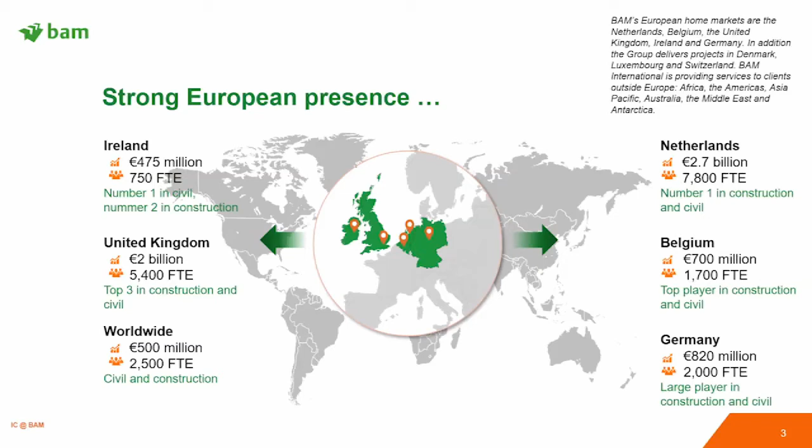I'm here to talk a little bit about manufacturing and construction at Royal BAM Group. Royal BAM Group is a 7.2 billion turnover construction organisation, headquartered in the Netherlands, with around 20,000 employees working worldwide. Our main focus areas are the UK and Ireland, the Netherlands, Germany and Belgium, but we also work on projects worldwide. We work in civil engineering, rail and tunnelling, and also construction and property, building stadia, hospitals and apartments and the like.

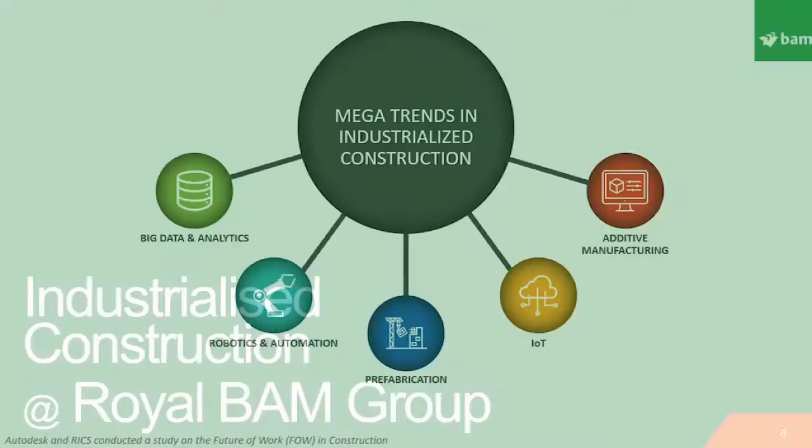So I'm going to talk a little about industrialised construction. Industrialised construction is the application of manufacturing techniques in the built environment. A recent industry report identified 5 mega trends in this area, and I'm just going to focus on those and show what we're doing around the business in relation to them.

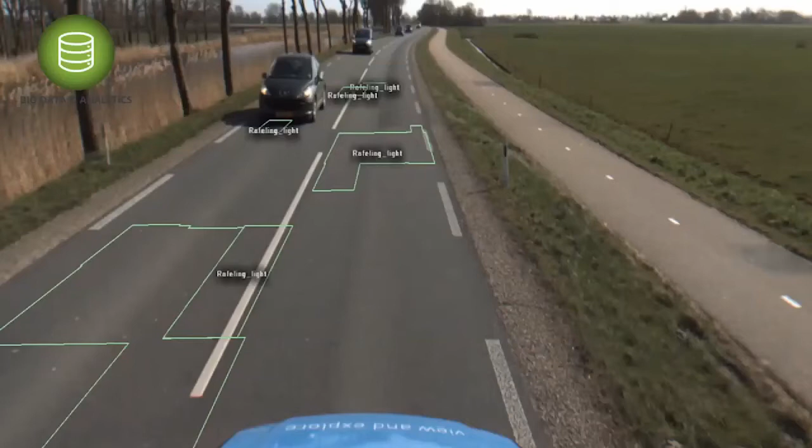So, big data analytics. In construction, we're using big data analytics to look at things like, in this example, surveying roads using a Google camera, a Google truck. This supports the maintenance programs we have in the Netherlands, so we don't need to go out and physically check the road surfaces.

In robotics and automation, we have a number of projects, but one of the more recent ones is the Hinkley Point project in the UK, where we're using machine guidance systems for installing, in this example, anchors. This allows us to do this based on data from the designers going straight into the machines and placing the anchors in the right positions.

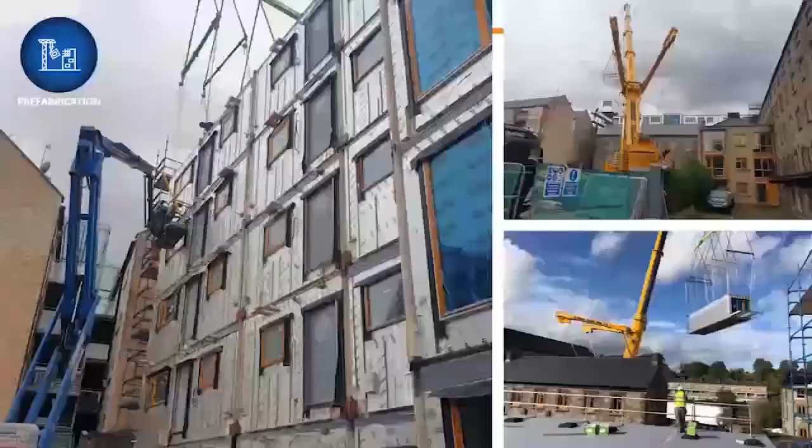Prefabrication is a large component of industrialised construction. We are producing full volumetric modules for housing in Ireland. We're also creating volumetric apartment buildings, which are 90% complete before they're delivered to site.

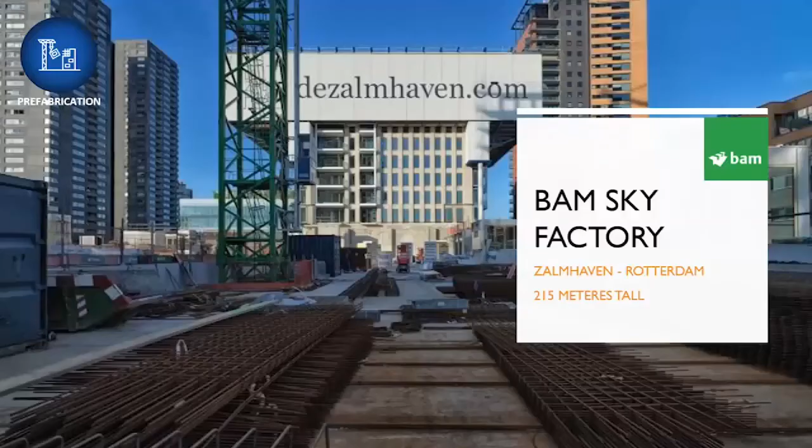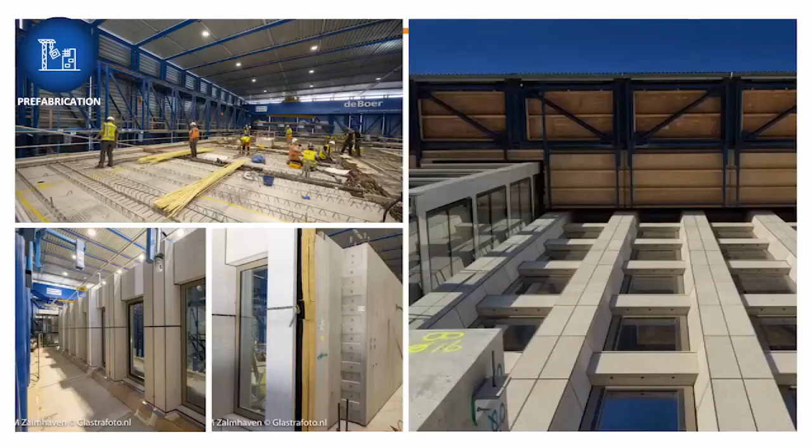We're also using panelized construction in our Sky Factory concept. We've been doing this for a number of years, where we basically bring everything together in a factory environment that lifts over the construction site. As you can see on the top left, our workers are inside a dry space installing the deck, ready for the next lift of panels onto the deck, shown in the bottom left-hand corner.

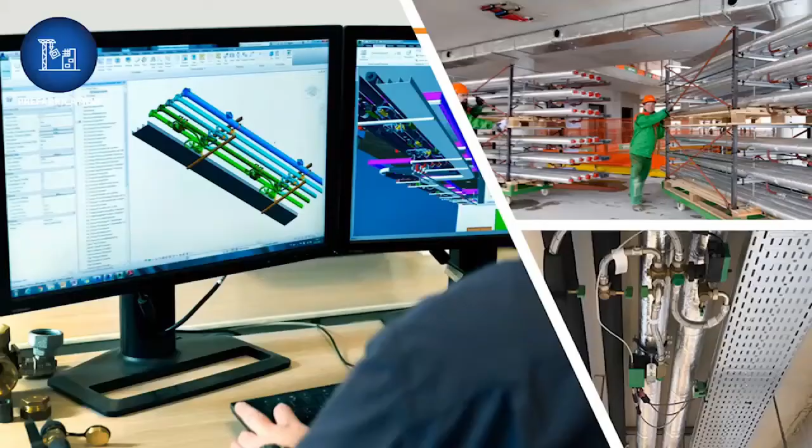We're also doing multi-trade assemblies for MEP into our projects. We coordinate the design digitally, and then we fabricate all the modules and install them in sections on site in our projects.

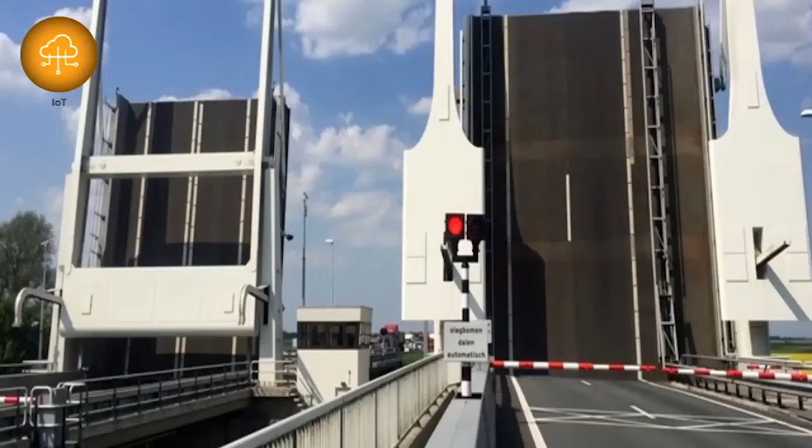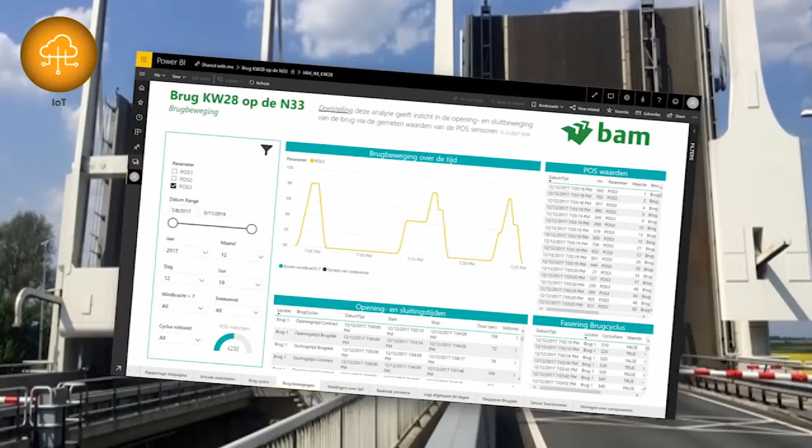For IoT, this is a couple of bridges that we installed in the Netherlands. We're now hooked up to those bridges, streaming data live on how they're being used, and this is enabling us to implement better maintenance regimes, because we understand how the bridges are being operated, and if they're being operated outside of their designed envelope. This way we can make adjustments in how they're operated, or how we train staff to operate them in the future, to avoid them getting stuck open or similar problems.

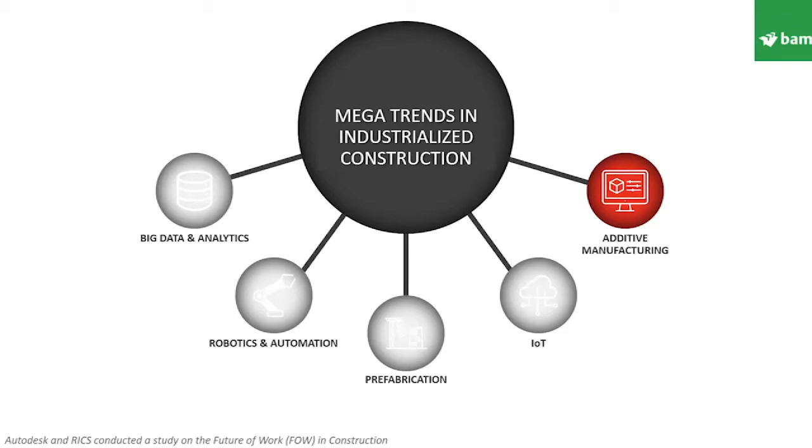In additive manufacturing, this is a newer focus for us at BAM. We are looking at additive manufacturing in the construction space, particularly 3D concrete printing. So we design, we print, and we assemble.

We have a 3D concrete printing factory based in the Netherlands, born out of years of development. This started way back in 2000 with our materials partner, Saint-Gobain, where they developed the mortar mix for 3D concrete printing.

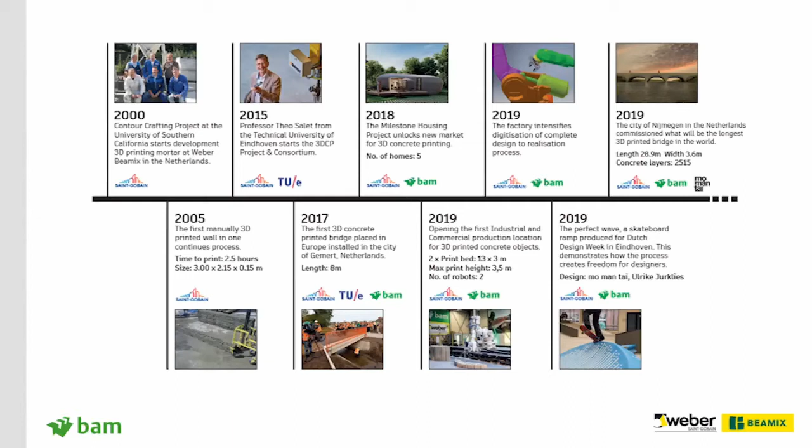Fast forward to 2017, we installed the first 3D concrete printed bridge in the Netherlands, a cycle bridge. In 2018, we started working on housing. In 2019, we opened our factory in the Netherlands, and also started to intensify our investigations into how we fully digitalize our factory setup and ordering processes. We also started work on the world's longest 3D concrete printed bridge, at about 30 meters long.

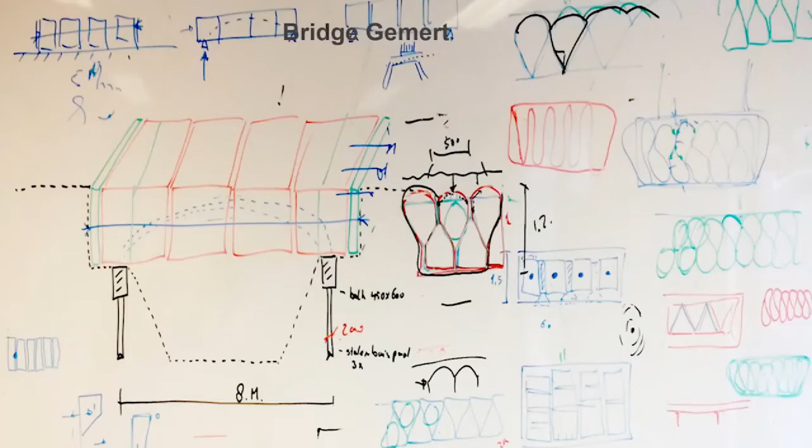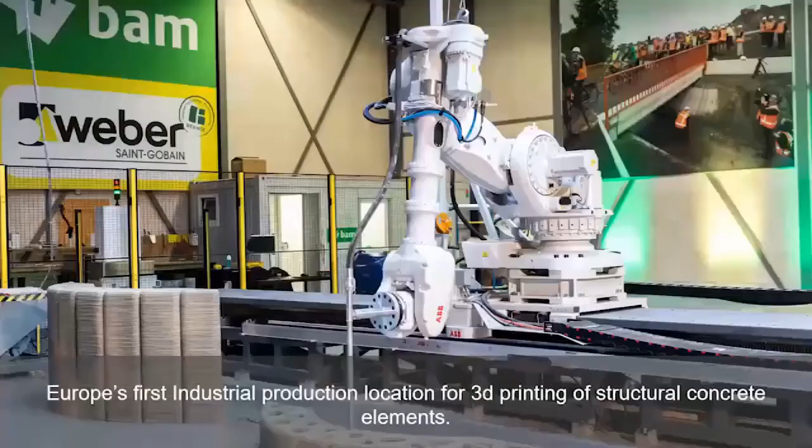We also opened Europe's first production location for 3D printing of structural concrete elements. This is now producing all sorts of elements for different projects around the world.

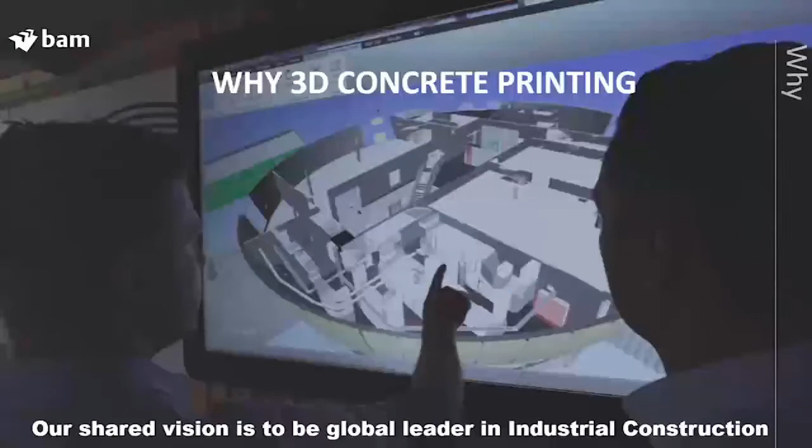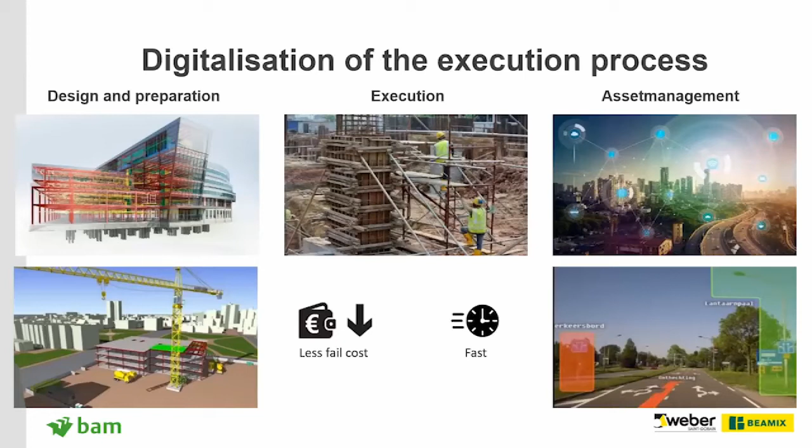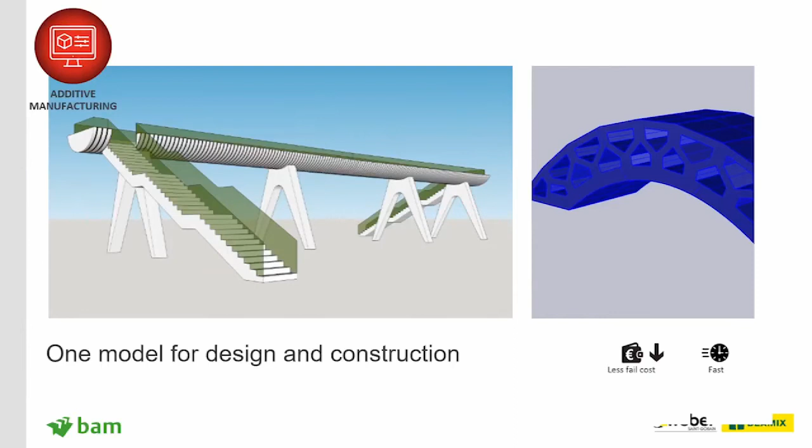So why 3D concrete printing? As I showed before, design and preparation, monitoring and management are very digitized environments, but we saw that in the execution phase we're still using very traditional methods out on site. So we saw an opportunity to improve and adopt more manufacturing type processes, even in the structural development of the project. In this process, the advantages are that we have one model from design to construction, so we're not reinventing the wheel constantly.

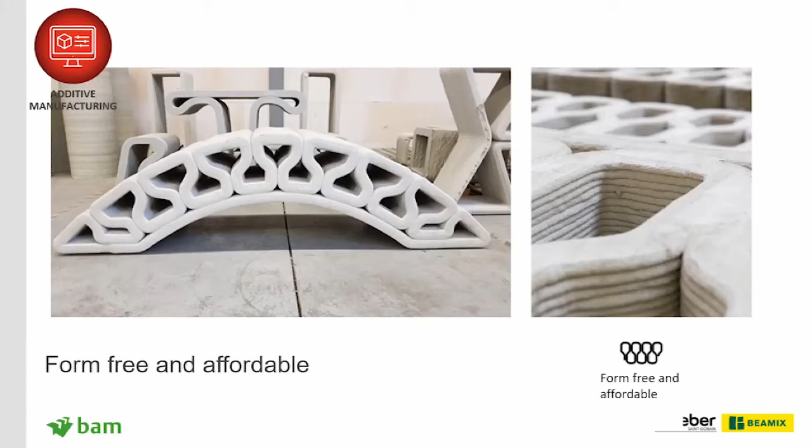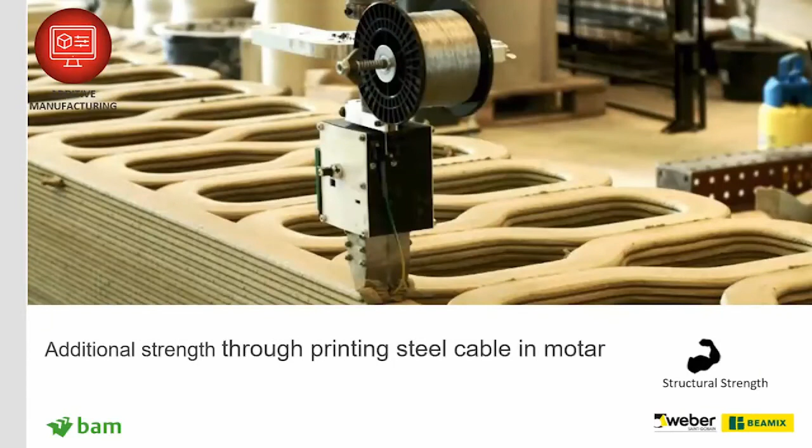We also have free form and affordable design because we're printing it, so we don't need expensive molds to create these different shapes. We only put the material where we need it, so there's less waste, with material only printed where the strength is needed. And we can add in, not only the compressive strength of the concrete, but also steel cable in each of the layers to create tensile strength in the elements being printed.

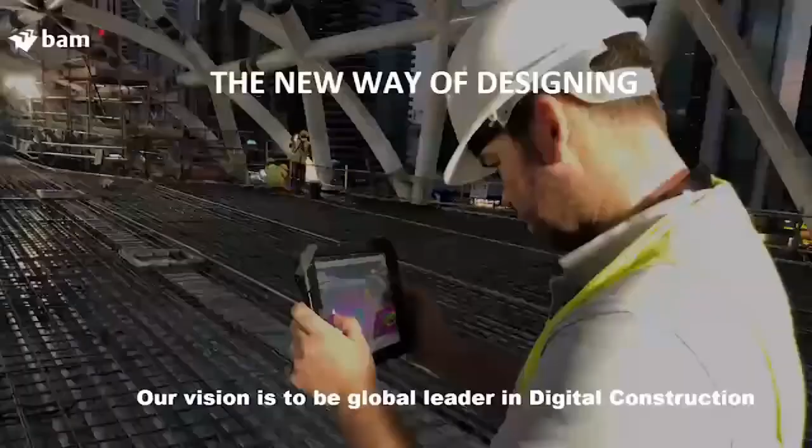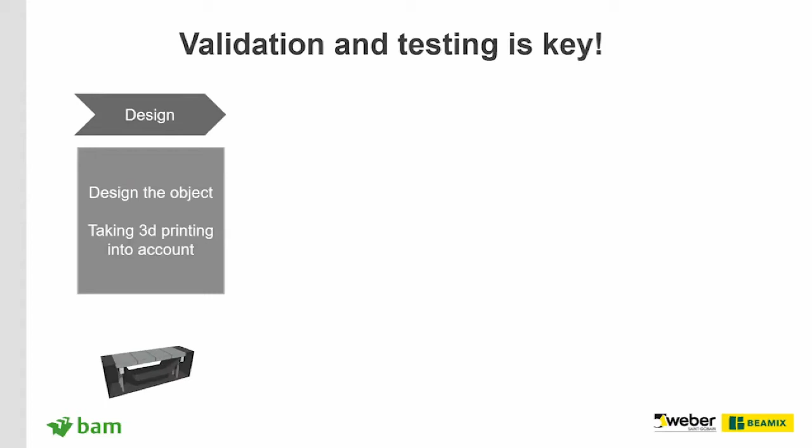So, a new way of designing. Now we design the object taking 3D printing into account. We work with customers and clients at an early stage to look at how we can solve a problem, rather than build 3D concrete printing into our process. We'll print a prototype and test and validate it.

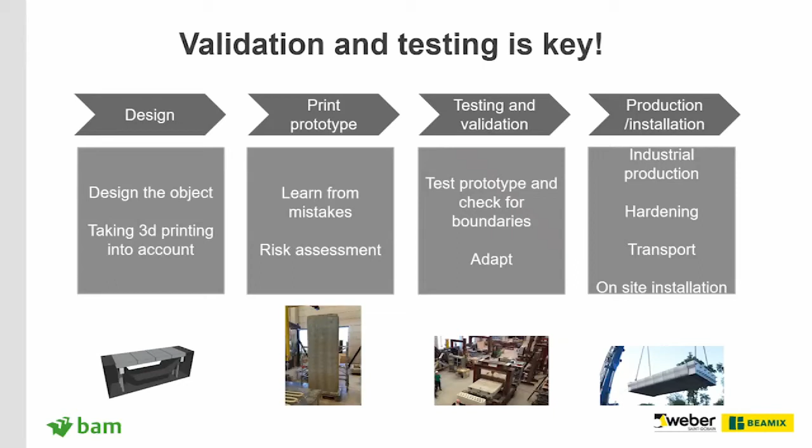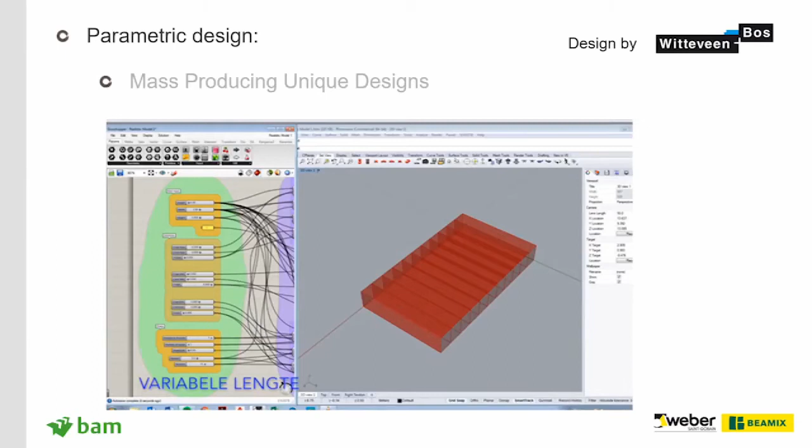We adapt to suit anything we see in our testing phase, and then we move to production and installation. Once we've designed one element and the principles are set, we can use that multiple times for different elements using the same principles. So we use parametric design for this, so we can mass produce unique designs.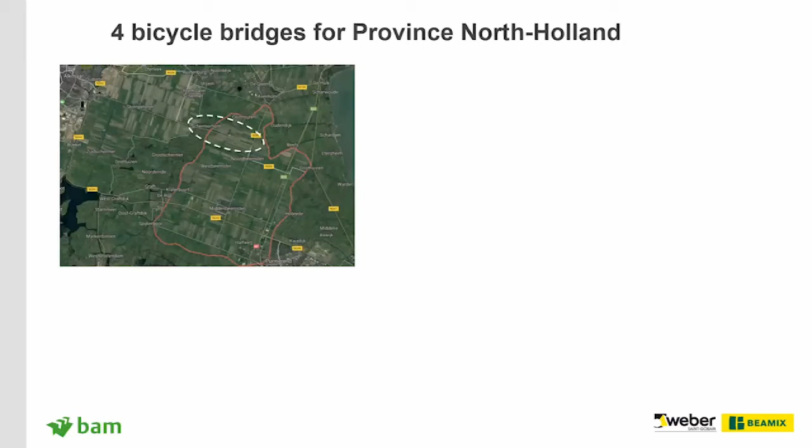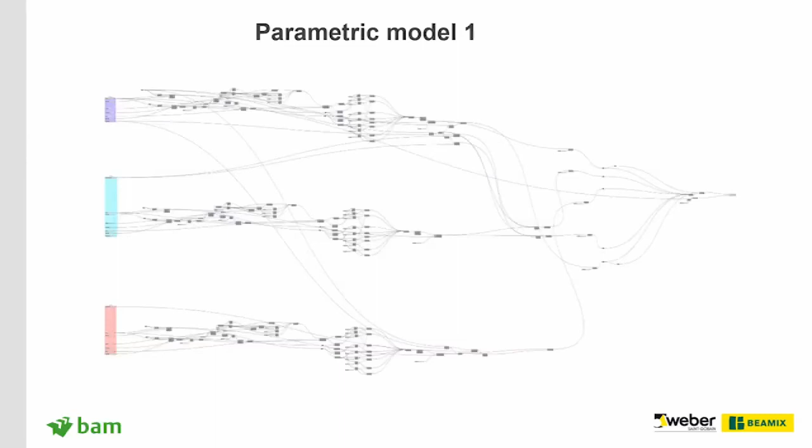So our factory - this is an example where we're using the parametric design in the north of Holland. We've got 4 bicycle bridges that we're going to print. We've designed, our partners have designed the bridge deck using a parametric model. This allows us, based on certain constraints, to have multiple designs for each of the bridges, but based on the same principles. So this is one version, and then this is all 4.

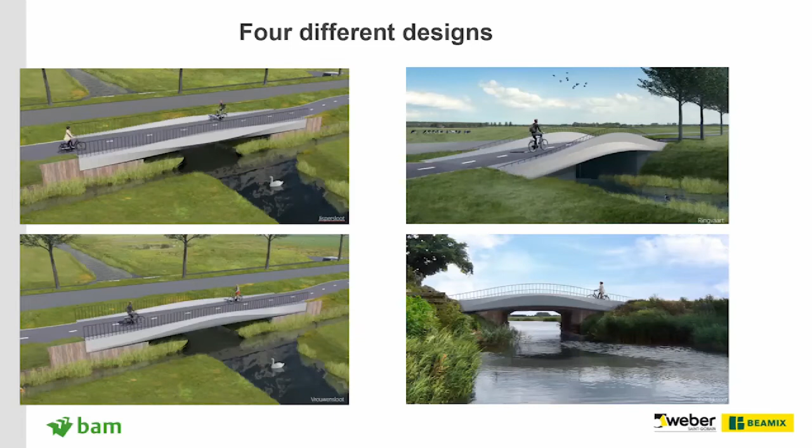All of these bridges are fundamentally the same. They've just been stretched or made wider or longer to suit the condition that they're in. But they're working within the same design constraints, which are in the parametric model.

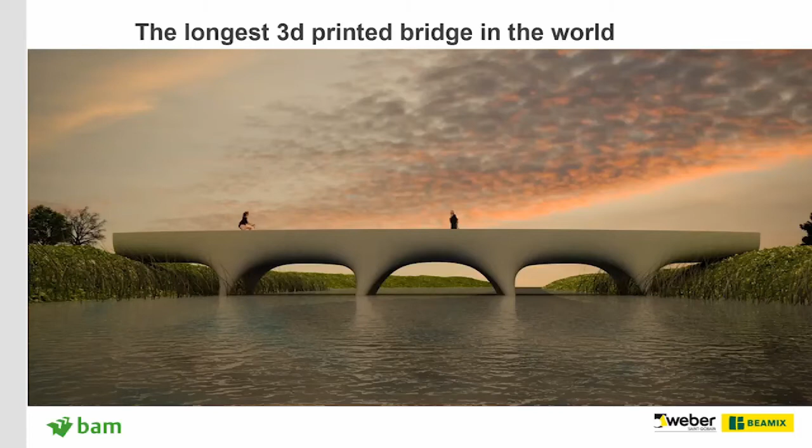We've also, as I mentioned previously, started work on the longest 3D printed bridge in the world. This is a visualization of the bridge. It will be printed in segments like this and installed on site.

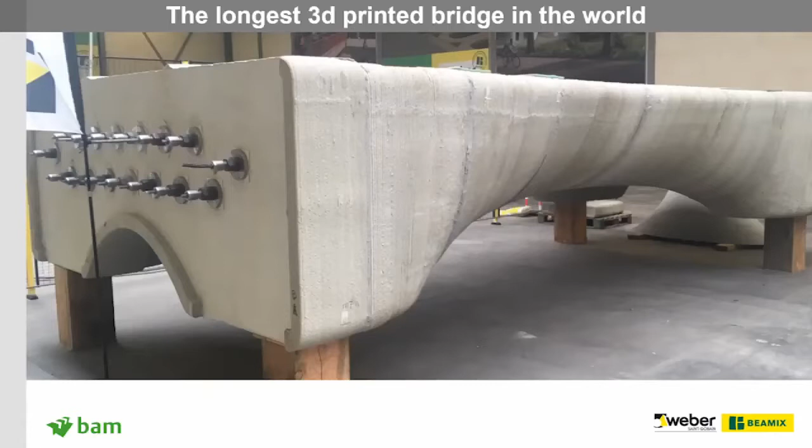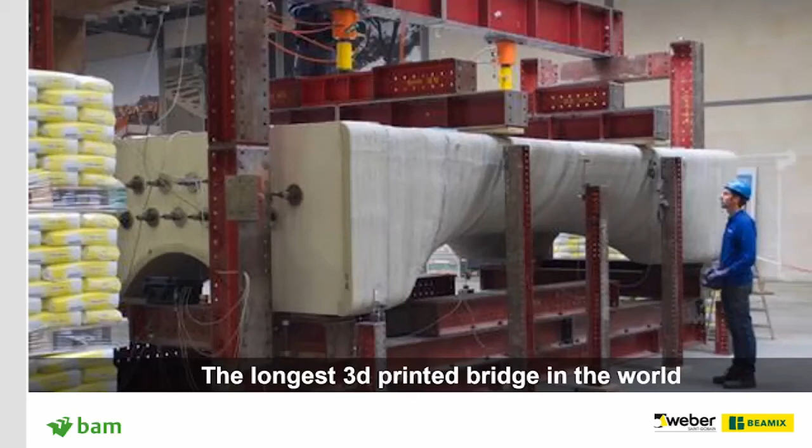So this is the first test segment, the one that we printed and tested. This is in our factory, load tested. These are the columns. These are installed on site and filled full of concrete and rebar, so that these are basically a formwork solution.

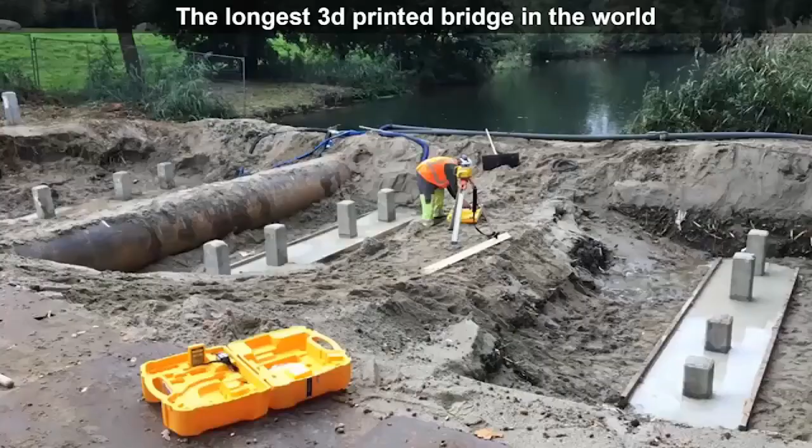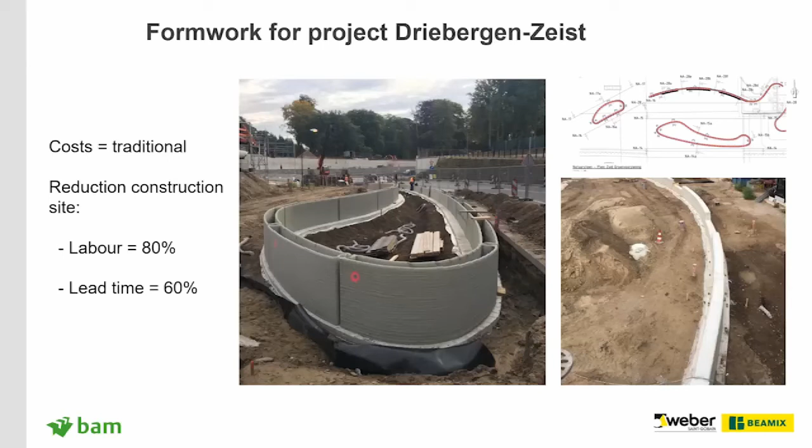So there was a reduction - the costs were the same as doing it traditionally as with the 3D concrete printed method, but we saw a reduction in labour and a reduction in lead time, which means we're on site less. We've got a shorter road closure, and our operatives are not in an unsafe environment any longer than they need to be.

This is an example of some head walls that we've printed in Driebergen-Zeist. Usually these would have to be cast in several lifts using fairly complex formwork.

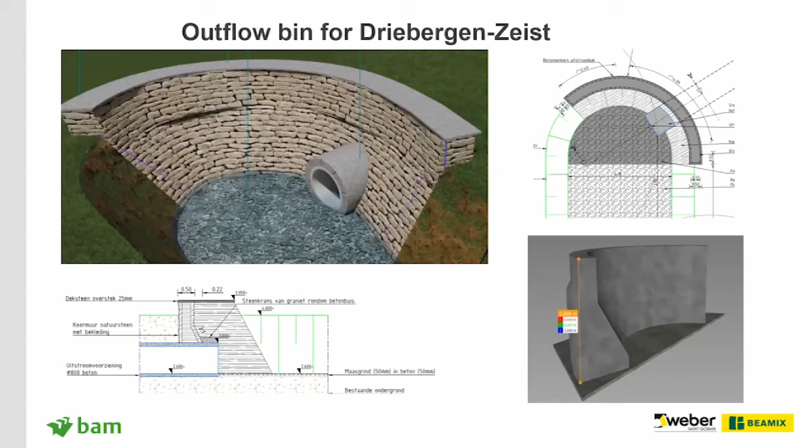In this example, we have printed the head wall in our factory in segments, and then these are craned into location on site, and then they can be backfilled straight away and put into operation much quicker.

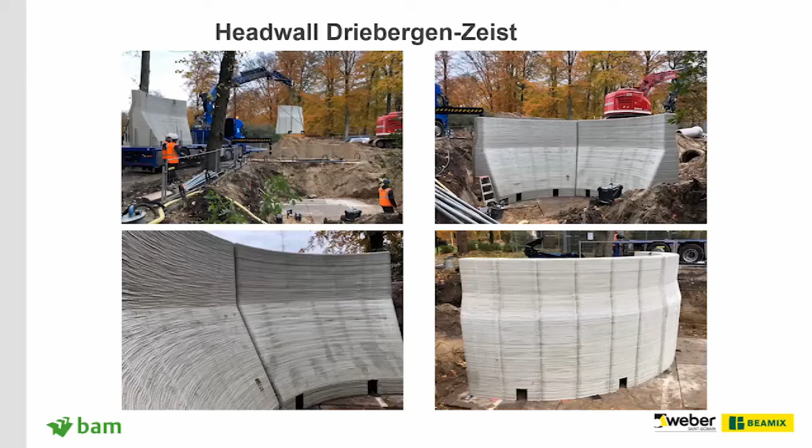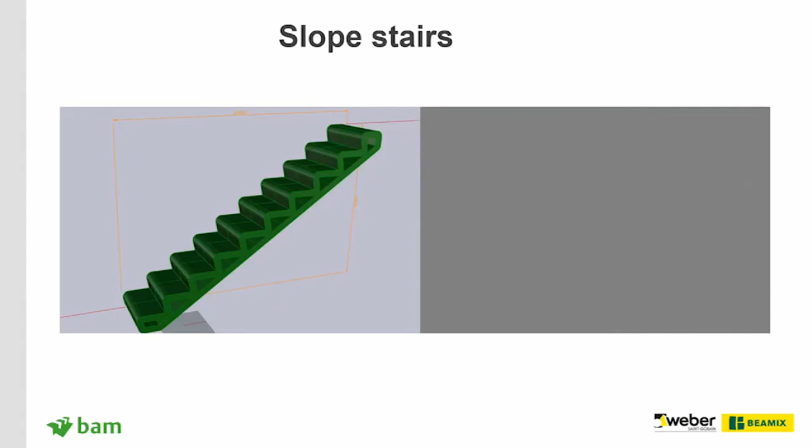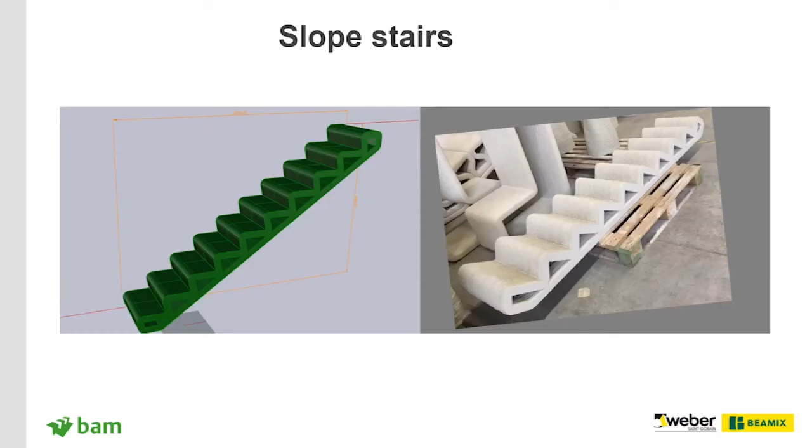We also have standard parametric components that are run through the factory. So this is a slope stair wall on our rail projects. The site teams will call the factory and provide the dimensions for the stair. We'll stretch the stair to suit those dimensions and then quickly print it. These are then installed trackside to allow maintenance access and access to project sites in a safe way.

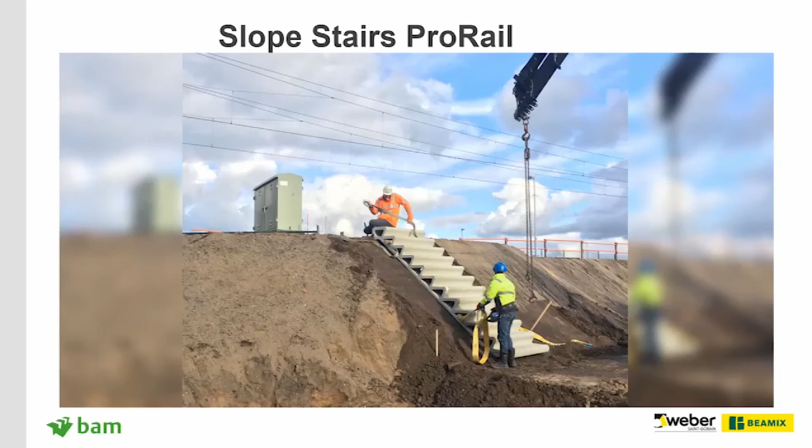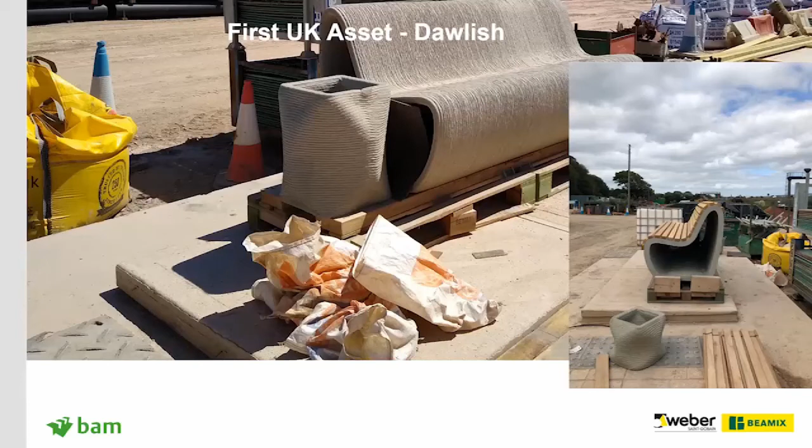This is an example of street furniture - the first UK asset in Network Rail's infrastructure that has been 3D printed. It's a bench down in Dawlish.

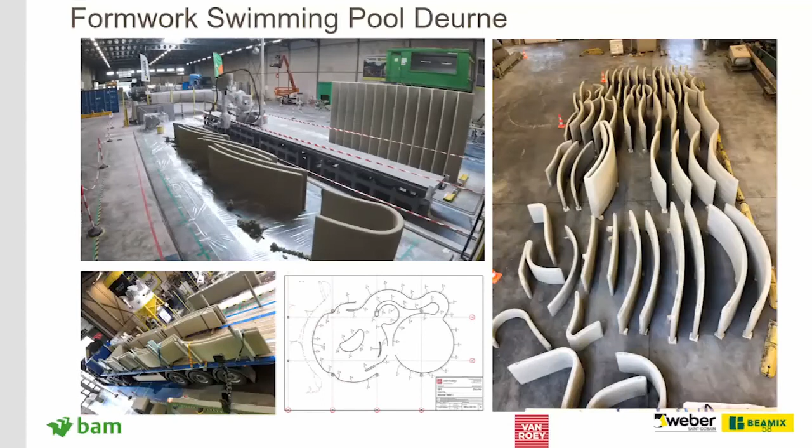So we're starting to bring these systems into different markets. We've also just completed a project in Belgium, a swimming pool with very complex geometry. We printed the swimming pool liner, and then this was just lifted into position on site, and then tiled as a finish afterwards.

And this is it on site, put into place.

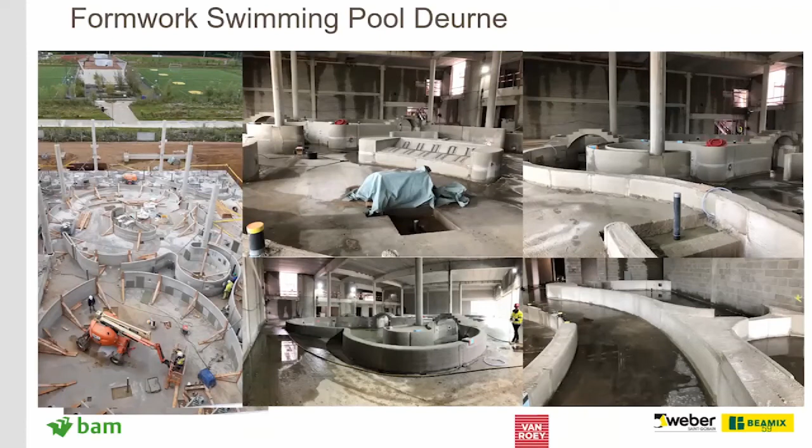So our latest project is a milestone housing project in the Netherlands. Again, working with our partners Witteveen and Bos and Weber, we've developed the concept for these houses and tested the solution. We've printed some of our largest elements to date.

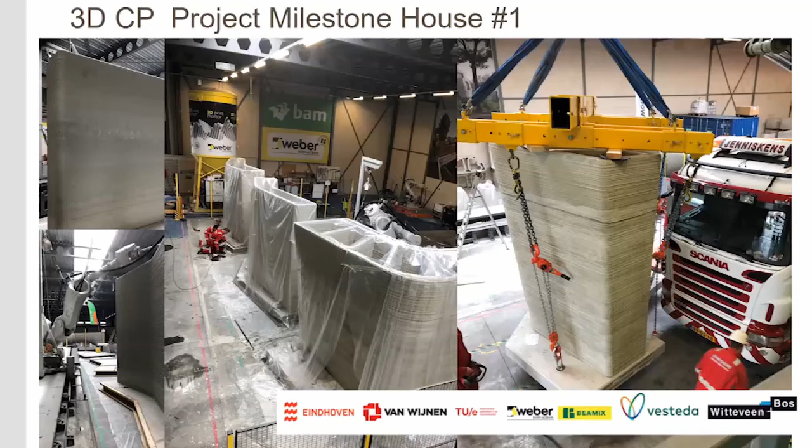As you can see, these are printed in the factory in segments on lifting slabs. Once the elements are printed, we then crane them out of the factory onto transport and take them to the site in sections. I think the highest segment is up to 3 meters tall in these pictures.

This is the factory running and printing the wall sections. These wall sections have ties in them, and then they're filled full of foamed insulation so that they're fully insulated panels once they arrive on site.